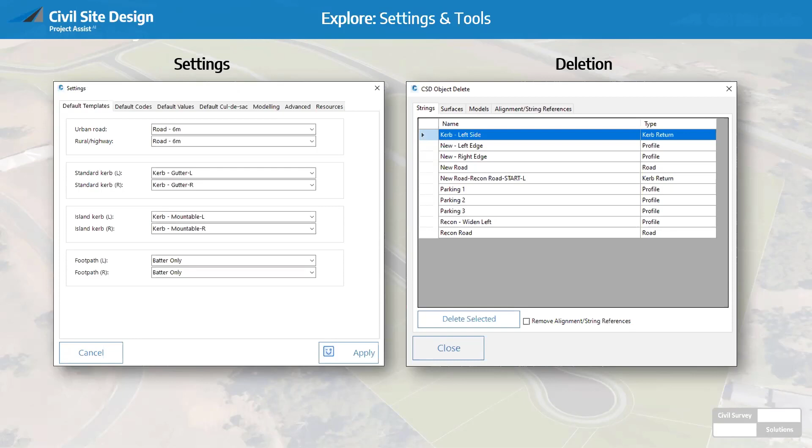So we're going to unpack some of what Project Assist can do whilst running through a set of projects. The key will be to loosely show you some of the settings and forms, particularly before we even start, just so we can talk through what the setup is.

Following that, when we actually start Project Assist, we're going to be looking at a couple of other forms which are really the key part of how Project Assist will work. One is the alignment usage type form, where the AI determines what alignment type, or string type, will be created for our particular alignment, and then the workflow manager.

Now, it's very difficult to explain this up front without actually showing you in context with some projects. So the way that Andrew and I are going to work today is we're going to create or work on 3 projects.

Andrew, I think one of the key differences between the version we showed in July last year and now is that you can work on existing projects as opposed to having to start from scratch.

Yeah, well, a big game changer was that you can run Project Assist at any time. Previously, in the beta, you had one opportunity to run it at the start. So now you can run it any time - you might even run it on a job you're currently working with.

Yeah, when it comes to everything we're talking about, including working on existing projects or new projects, this morning we published a playlist of quite a number of different videos on our YouTube channel, which talk in depth and unpack all of what we're going to be doing today.

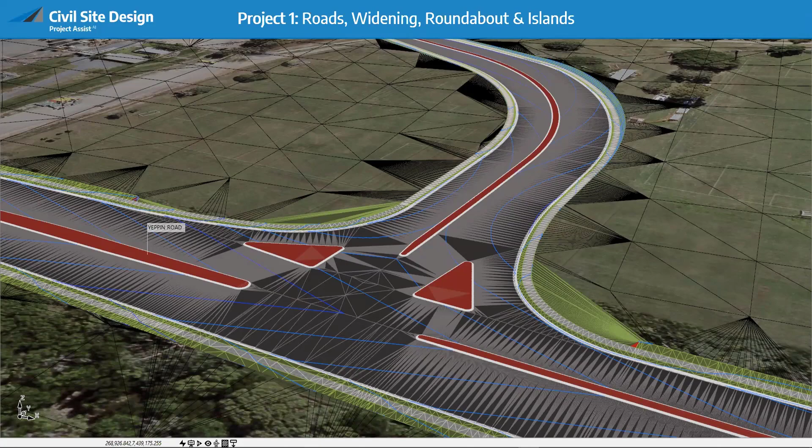Project Assist will do all of that for us, which is extremely exciting to see. Secondly, we'll be looking at a reconstruction road, building up in 3 phases, putting in a new road with some custom widening. Following that, we'll connect another road which has some widening and saw cuts. Then we'll get Project Assist to put in the parking bays. A lot has happened regarding trimming and maintaining elevations and connectivity, all of which Project Assist will do, and we will show you.

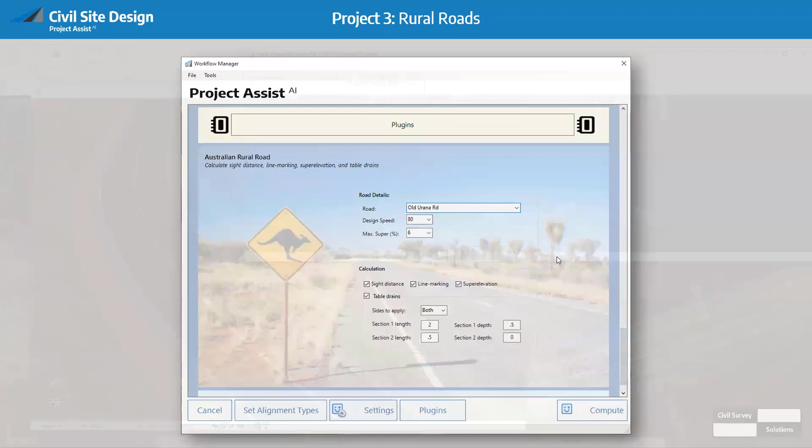I've got these 3 slides for the rural road. Towards the end of the session, I'm going to explain the idea of plugins with Project Assist, and we've created a plugin called Australian Rural Road. I have a background at council, working for a regional council, so I used to do a lot of rural roads. In my example, I'll show you this plugin which will automate super elevation, sight distance, line marking, table drains, all of that type of stuff. It shouldn't go too long, but the idea of plugins with Project Assist is pretty exciting for us as well.

For those of you that missed it, there's an example of something you may see in civil site design today, which we are using - well, at least I'm using a beta. So we'll be able to show some new exciting stuff coming as well - get a sneaky preview of some of the extra bits and pieces.

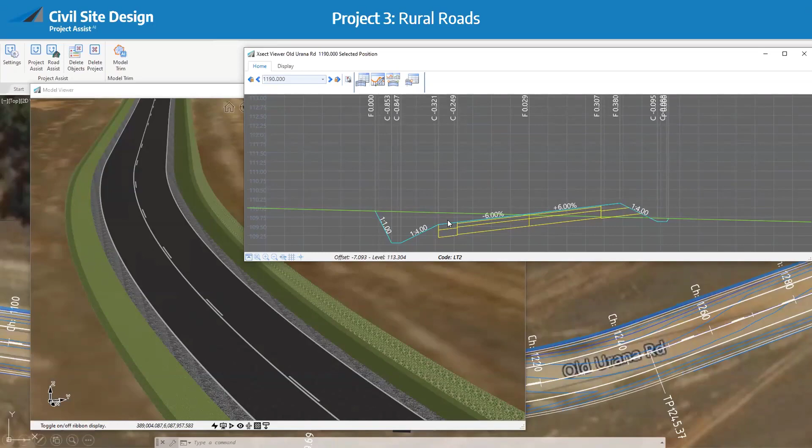Following on from a question we had earlier, about the version of the Autodesk platform and BricsCAD version this will work on - Andrew, would it be 2016? That's right, yes, onwards, and then BricsCAD V21. So anything pre-2016, unfortunately, we won't be able to use.

This project, all of the projects you're going to see today, are real projects. This is a customer project provided to us from Queensland. As far as setup goes, I have alignments that have been created by myself to delineate not only the crown, but also the left edges and right edges for all of the different roads. There's only two - and then we've got an alignment to delineate the outside edge. You'll notice you can see the alignment for the islands and the alignments for the roundabouts, but they're not going to be in play. So really all we're doing is focusing on the roads that we've got in play - I said two, I meant three - and the custom kerb returns that are added in here.

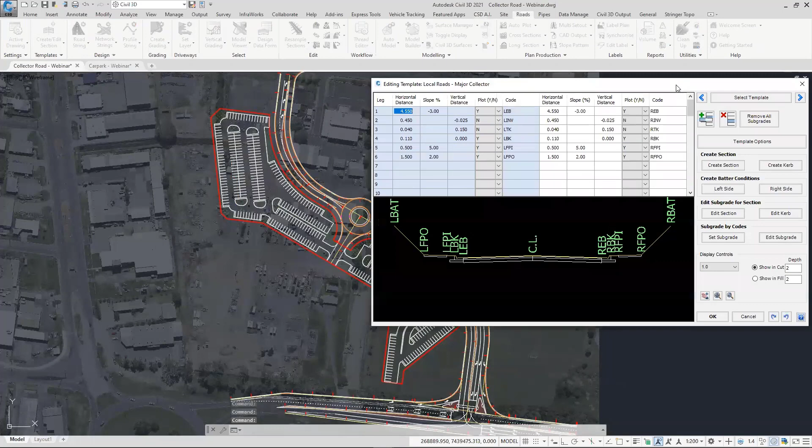As far as the software is concerned, we haven't done anything with this job. We have drawn the alignments. We've got one template, this template here, that we're going to be using for the roads. The kerb returns are going to be using auto, as you'll see in a second. So as far as setup goes, it's all relatively straightforward. As a manual process, I'd be looking to maybe use auto kerb returns, auto road creation, then manually creating the kerb returns myself, and applying design variations to widen the EB codes onto these alignments.

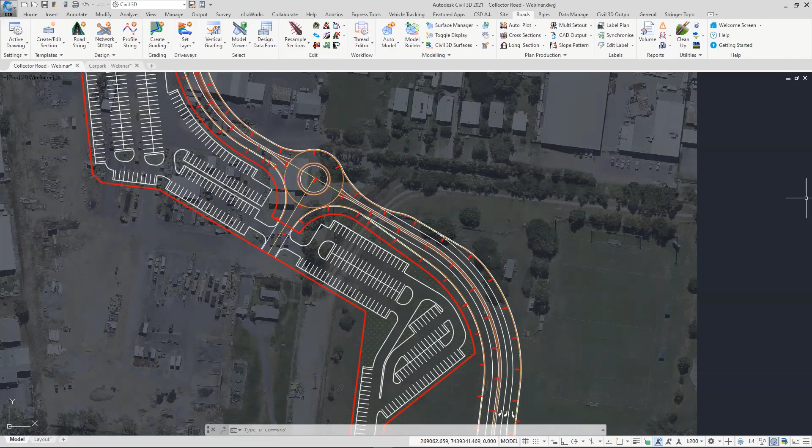I've just had a question coming about how do we access Project Assist. On V22, you'll see this ribbon up here - a ribbon tab. So on V22 onwards, you will see CSD AI, which conveniently is where I'm going to be going now.

Before we start, I'm just going to unpack a little bit of the settings. We have a video dedicated to the settings on YouTube. If you have a quick look at that, it's an 8-minute video, but it unpacks all of this in context to how it works with Project Assist. I don't just simply talk through the form - I show you in context how it works with what you're actually going to be producing later. But just a few things for you.

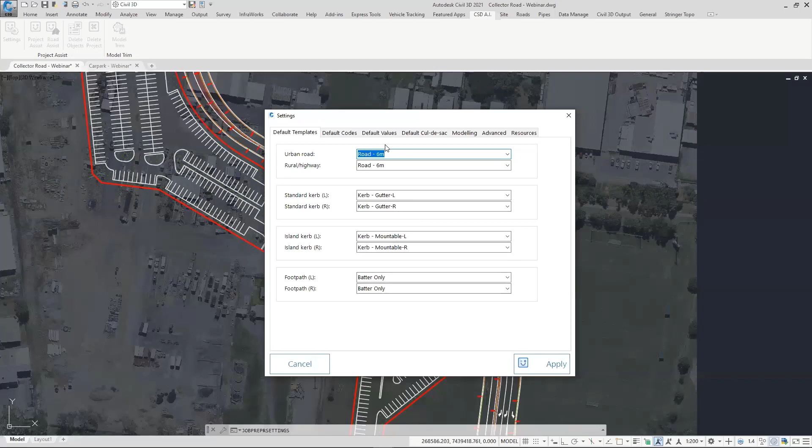First of all, what the software will do is look to assign these templates that you can see here to different aspects of your design. These are from your data folder. So in a second, Project Assist will fire up and it will go, hey, you've got an urban road here - this is the template I expect you'll probably want to put on there.

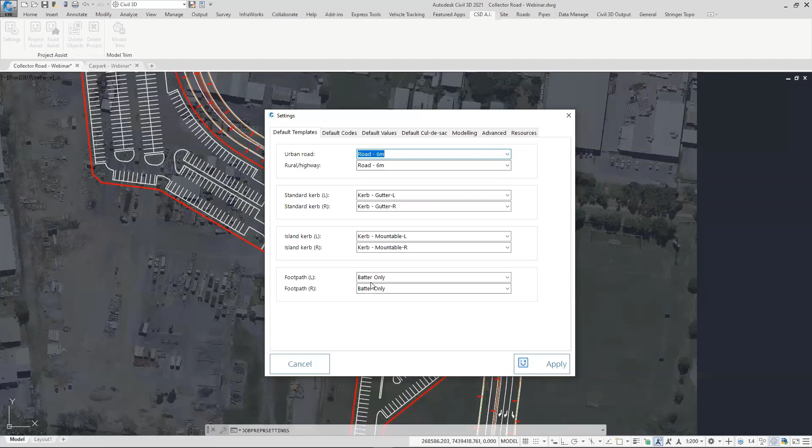Now, in my example, I'm going to change it in a minute, but I'll be using this one instead. So for each job, this is unique, but this just allows you to come in and predefine roughly the templates that you'd be looking to use. The default codes are what Project Assist will look for and then look to manage for you later on.

For example, I might be using a template where I've got a saw cut, and when the software sees the SAW code being applied, it will determine a number of different things it could do with that particular code. If you don't use saw cut on a job and you use SW instead, go ahead and change that.

There are some other tabs in here, but due to time, I'm not going to go into too much depth with them, only because we are really very limited. The video that we've created for this unpacks this in great detail to show you exactly what this does.

Andrew, have you got any comments on that, or I'm happy to proceed, or if you've got anything specific you might want to mention from this? No, I reckon jump in. The only thing I'd say is that video you've got on YouTube that you posted today on the settings is brilliant. It's about 9 minutes and it covers everything in great detail. Great, yeah, great, thank you.

Right, let's get started off. So I've got alignments, I've got templates. That's literally all I've got to start with. So I'm going to go to Project Assist.

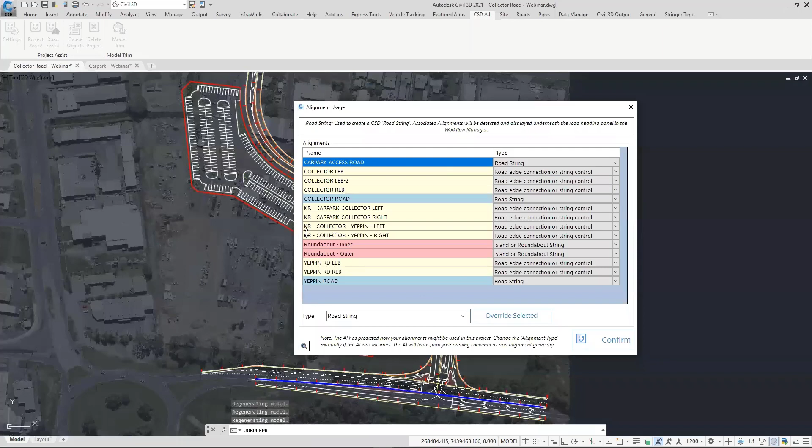Now, this is called the alignment usage form. There's a 6-part video series which explains what this does and then unpacks all of these different types. To make life very simple, for the start of this job we're going to focus on 2 types for all of these alignments. We're going to ignore the roundabout for the time being, but the reason why I've left that in there will become clear in a second.

So it has a look at all of your alignments in your project, and then depending on the naming convention, it determines what type should be applied. And as you just saw there, I can actually just go and pick a different type and override it.

Car park access road, which you can see highlighted in the drawing, collector road, which you can see is highlighted in the drawing, and Yeppin road - yes, they're going to become road strings. The alignments that are being used to control the left edges of bitumen and right edges of bitumen on all of them are always going to be set up as road edge connection or string control.

You'll find that road edge connection and string control does a multitude of different types, okay? But this is the one we're going to be picking. So for the LEB, the REB, the highlight on this is really helpful as well, so I can actually see where the alignments are.

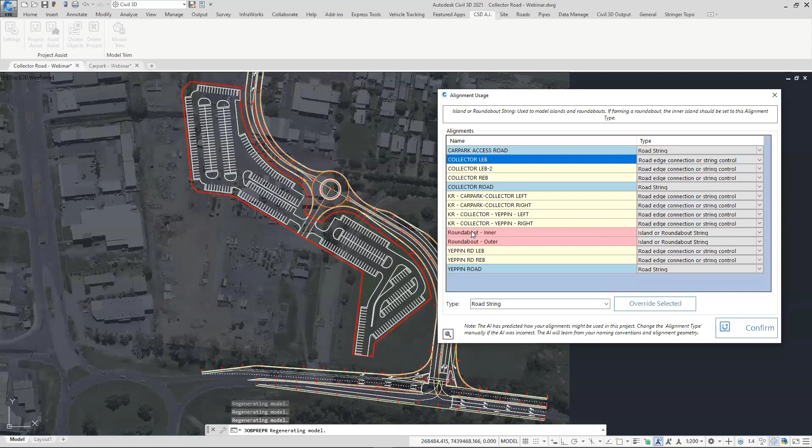Even things like network strings, curb returns, cul-de-sacs, knuckles, etc. - sorry, cul-de-sacs and curb returns only - they're always going to be assigned as road edge connections and string controls. The only difference with the roundabout inner and outer is that we're going to assign a different type, and I'm going to cover those when I look at adding the islands later.

Let's click confirm. Now, this is basically the first time this is run. So the software's gone in and had a look at the different types that I've set up and then determined how everything should be associated. So this is what the workflow manager can do.

So car park access road, this is the road over here. It's saying that it's going to turn it into a road and apply a template. All of them are going to have the same template. So as you can see here, I'm overriding that.

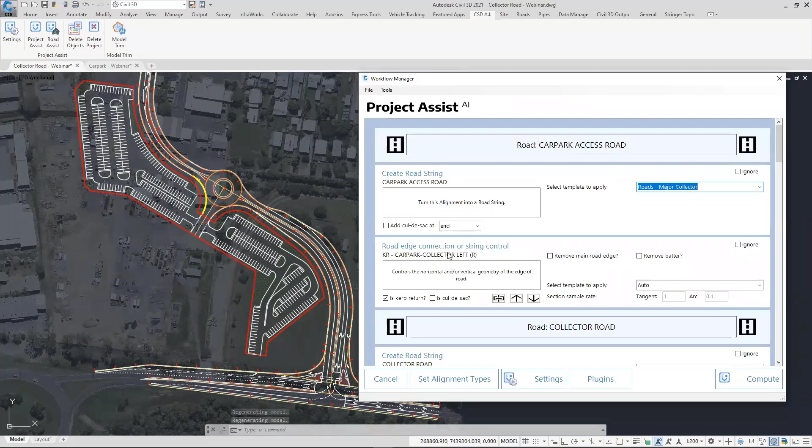Underneath, it's then got an alignment that we created for a custom curb return. And it's determined just by this checkbox here that it should be a curb return, okay? And because it's connected to, or associated to, the side road - car park access - this is the right place. So any curb return you create is always going to be associated to the side road.

Now, you'll notice that only one of the curb returns is being listed before we move on to the next road. And this is because, not every time, but sometimes Project Assist might not be able to determine which road the alignment should be connected to.

Right at the bottom, you'll always have a list of alignments that are not associated to roads. Now, we know that this car park collector road right here should be associated to the car park. So what we can do is use this little button here to associate it to that road.

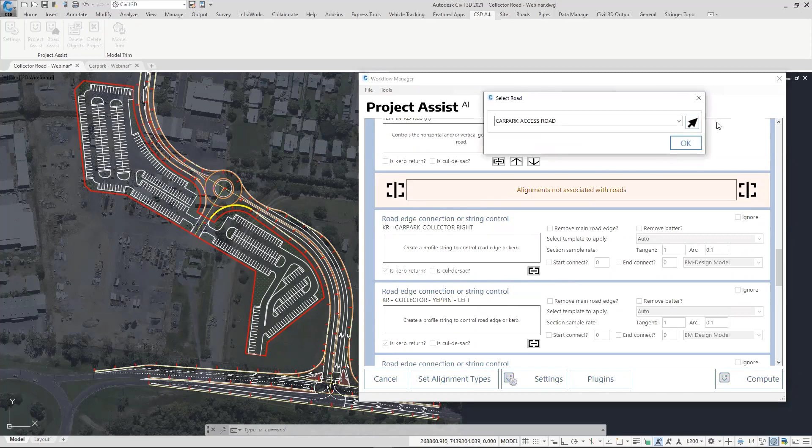I'm going to click on the button, choose car park access road from the list, click OK. As we go all the way up to the top here, you can see that I've now got car park, collector road, curb return, right and left, both associated to that road.

Further down, we've then got the collector road itself, and obviously the template we're picking there needs to be roads major collector. We'll be unpacking some of the discussions on thicknesses and resheets in the next job.

The LEB and LEB2 alignments, which are basically following along this left side here, the software asked what would you like to do with these? I can either take the LEB, maintain the crossfall that it is at the moment, say it's -3%, and position it onto an alignment. So it's basically using the match to alignment variation.

The second option says what I can do for you is create a string, a profile string on top of that alignment, and you can go in and have the code positioned on that string and control the horizontal and vertical elevation of that particular code. Lastly, you can then actually have the software create a completely independent string, so it won't be attached with a variation to the design.

We're going to just simply use horizontal control and maintain road crossfall, which is pretty much matched to alignment. We're going to do that for the LEB1, LEB2, and further down, you'll notice that it's saying it's creating a separate string.

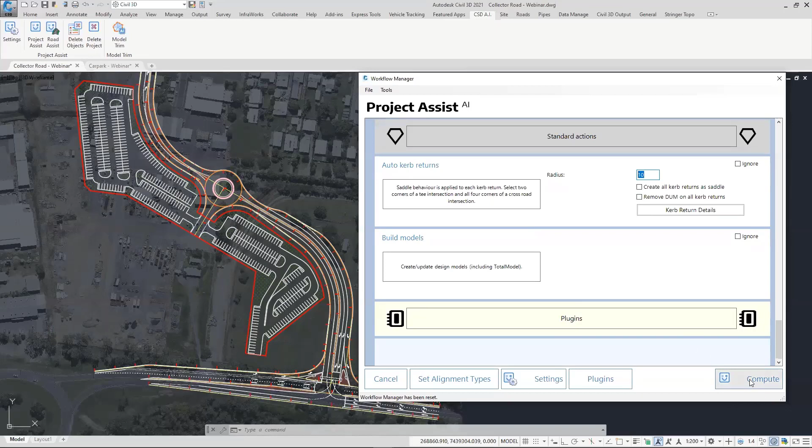This is real time. This is not me doing anything other than just letting the software build, construct variations, curb returns, and put everything together. Whilst it's building - in fact, that's done. Okay, so I'm just going to bring this in.

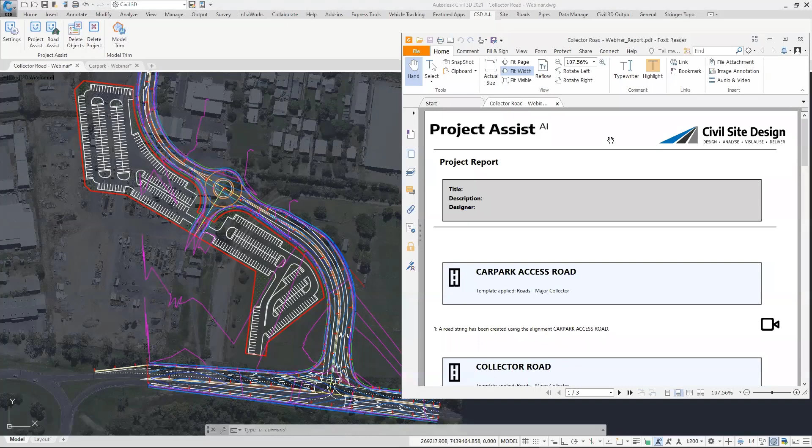When Project Assist has completed a build, it will generate for you a PDF report of every single step that it has done. So what you're seeing here is all of the work that you as a user would be doing if you were to create this yourself.

One of the best things about this is it adds in extra sections for detail. So when you're creating roads initially, you're thinking, well, okay, I'll just set this to 10 meters or 15 meters, and then you have to go in afterwards and start adding extra sections, whereas this does this for you. You can see here from the 29 steps that have just taken place in a matter of about 20 seconds, it's now built this for me.

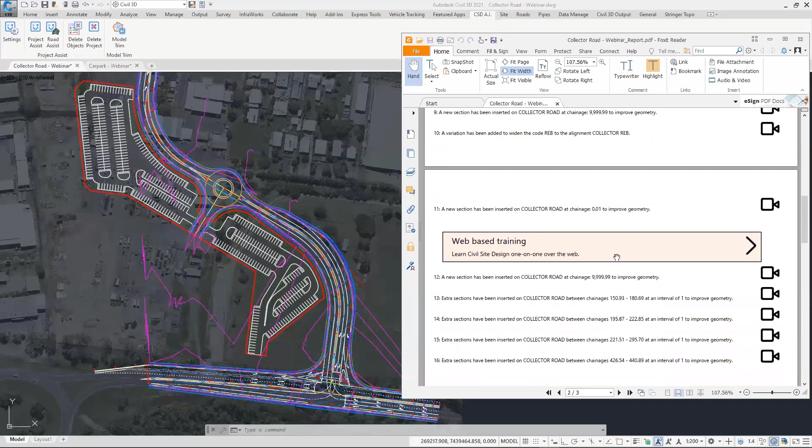Really, really recommend, when you run this for the first time or second time, look through what it's done. It's really important because you want to make sure you've set it up correctly, and that the correct variation, for example, has been applied over the correct chainage range, etc. This is building this for you, but we need to always have a run through to check it. Let's just see what it's done.

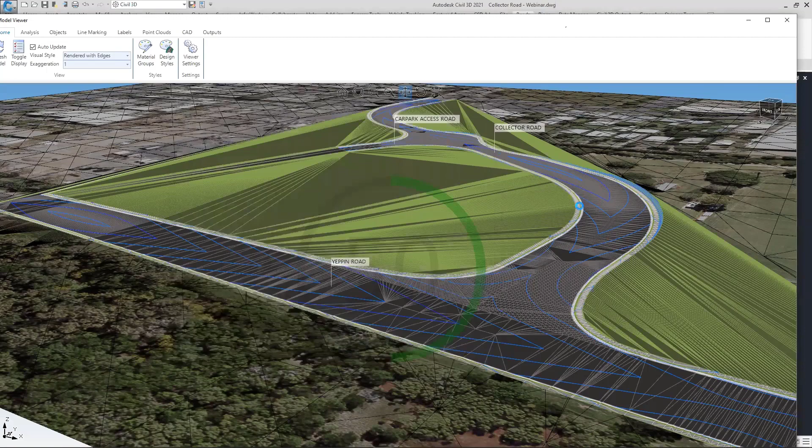What we'll do first of all is just go to the Roads tab, Model Viewer. Time is racing away, so I'm going to have to get through this quickly. Just bring Model View over to one side. I'm not sure why the built model got created, but anyway, that's something inherent from this job - we're just going to go okay. So if we'd started this job from scratch correctly, you would be seeing this. So this is what Project Assist has just built for us - got the roads, got the intersections, got the widening.

If I right click, display a cross section, we can see here by going to the display tab, and let's just pop in some alignments for collector LEB and collector REB. You can see it's matched up the codes onto those alignments. And if we go open section data, it's taken the LEB, matched it onto the alignment, and taken the REB, matched it onto the alignment. It's done that for all of them.

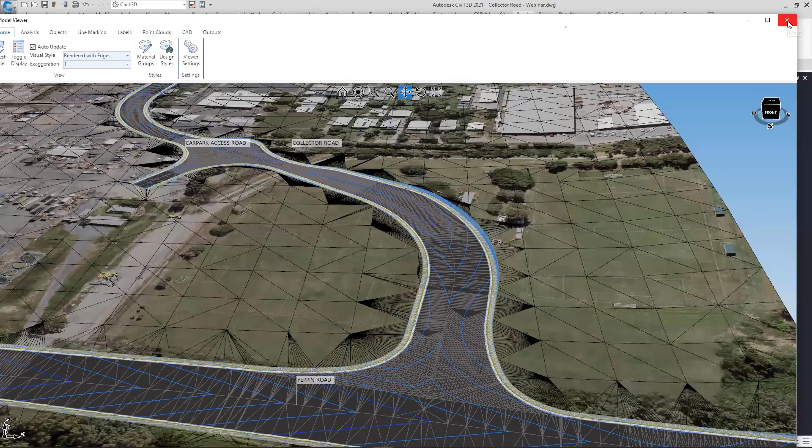So as far as just quickly generating content goes and building your road from scratch, that's obviously the first part. The second part is, well, what if I want to add islands? Now the islands are quite extensive, as you can see here.

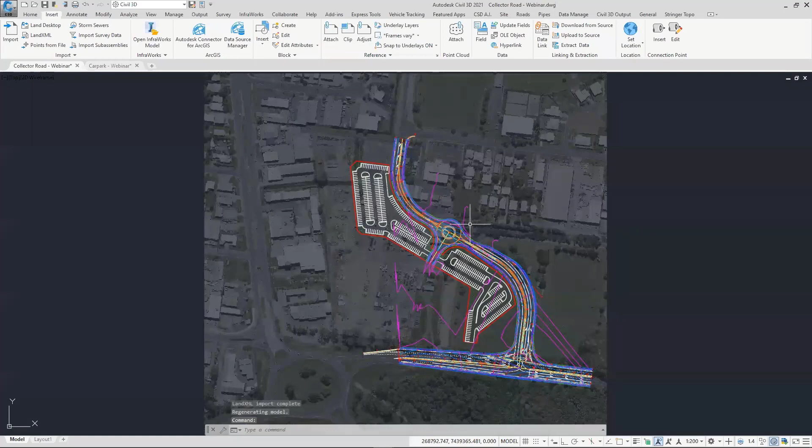Well, in fact, what we'll do is first of all bring them in as an XML. So rather than having them in the job initially, what I've done is created them as an XML file. And the reason for that - when we looked at the alignment usage form, it would have been quite overwhelming for you guys to see a lot more alignments. So we've basically done this in two parts to reduce the impact.

So we've got alignments here for our islands, as you can see here we've got 6 of them down here. And we've also got, which I'd already had in the job - a great way of being able to show you how ignore works - a couple of alignments for the roundabout. So the intention is that these islands will simply become draped profile strings draped onto a surface, and then the roundabout will also need to be draped.

Now let's run it, but there's going to be a small caveat with this - just saying simply drape onto total model won't work. So what we're going to do is go to project assist. You can see the roundabout, outer and inner, are still there.

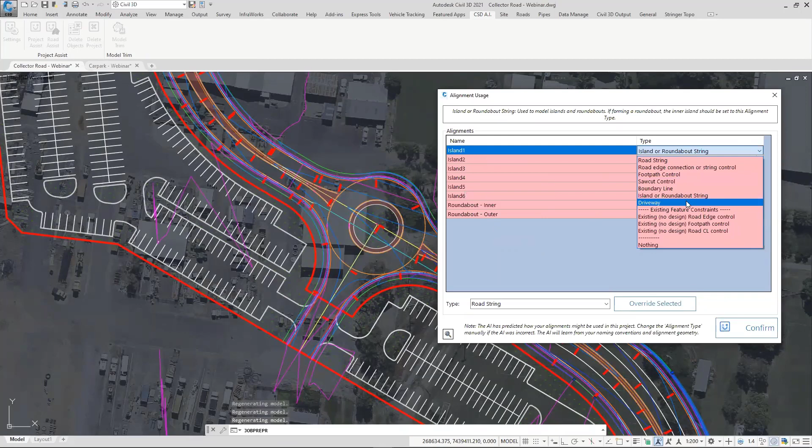They're all being chosen as island and roundabout strings. Okay, the software will know if it's a roundabout as opposed to an island, but they're all getting the same tag. We're going to click on confirm.

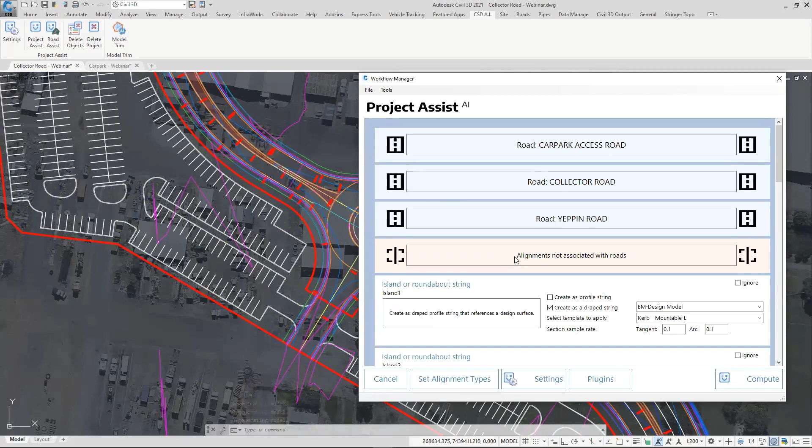Even, and this is my bit with this - even if you use Project Assist just to do these islands, just to do islands on projects, it's still a huge time saver as opposed to doing this all via Model Builder.

Now, they're not associated to roads, because they're going to be draped onto a surface. When you create a draped profile string, you always determine that there's a surface that it's connected to. The surface it will be connected to is this one here.

BM design model. The software is going to use Model Builder and create a model which combines all of the strings already in the job, including Total Model. It's then going to take that model and allow us to drape straight onto it.

Once it has draped the islands onto that surface, we've got a model with islands placed on top of it. If I want to see all of that combined, the software will go ahead and create another model which combines the design with the design of the islands.

You'll see this happen in a second. This will take a little bit longer than the previous one, but it gives us a chance to unpack maybe the PDF. The reason it'll take a bit longer is that sample rate of 0.1, and those islands are quite long.

I might speed this up a bit, because this is one single radius, so imagine every 100 mil around that arc, it will take a bit of time. For the remainder, I'm going to be putting in every 3 meters for a sample, which compared to 0.1 is quite a bit healthier, a little bit quicker.

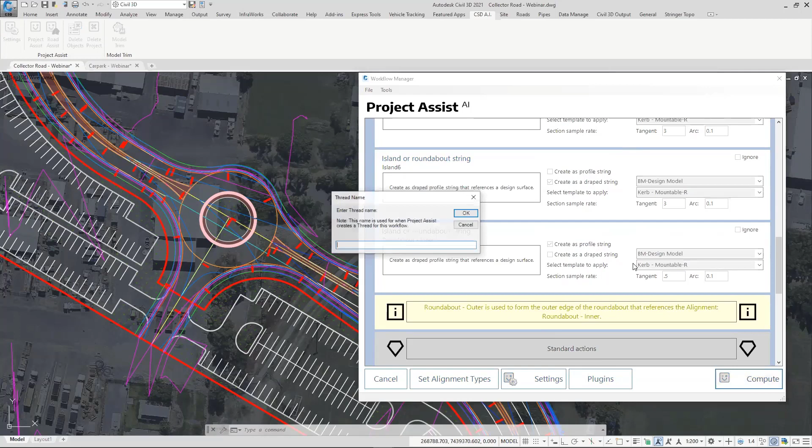Let's click on compute. I'm going to give this a thread. Now this will take a little bit longer. As Andrew's already pointed out, the sampling can be increased.

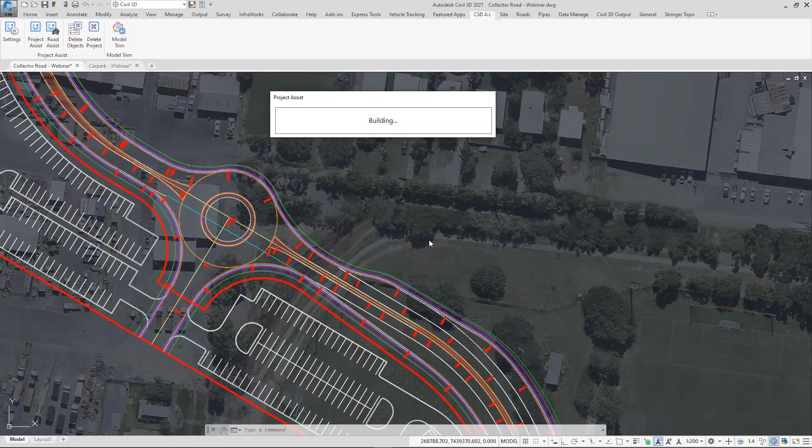To be honest, when I've run this with the sampling around 0.1, it takes about a minute. You may be thinking, well, a minute to create that many drape strings - maybe you're thinking that's incredibly quick.

What it's also doing here, whilst draping the strings onto that surface and creating them, adding the template, is it's also using Model Trim to cut all of the centerline and dumb codes out of the model where they overlap on top of these particular strings.

So in a minute, what you're going to see is the centerline no longer within this particular model being drawn underneath these islands. This is the part where Model Trim, using Project Assist and Model Trim, comes into its own. So that's perfectly timed.

As you can see here, we've ended up with approximately 51 steps being taken. So I might just close that down.

Let's have a look at what's happened here with the model. I'm actually going to jump straight into Model Viewer. This gives us the best context, particularly when it comes to looking at drape strings, to see what's happened.

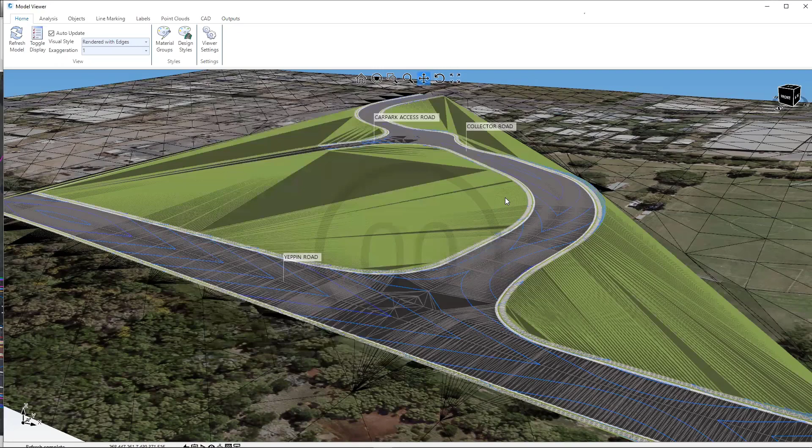So here's Total Model. We'll go Toggle Display, and we'll ask it to simply just show the built model here, built model design. So the software went ahead, created a built model, and just said, hey, include Total Model. That's all it's done. Then, once it's done that, it's used that to drape on the islands, which is this model here. I'm going to click OK. And this is the work that it's done.

So for a start, this is one of the nasty little islands that I've had to use Model Trim for. Project Assist has used Model Trim to trim the dumb codes from the curb return and the edge codes from the road to complete that all the way through. We'll come back to what's going on here in a second, including the roundabout.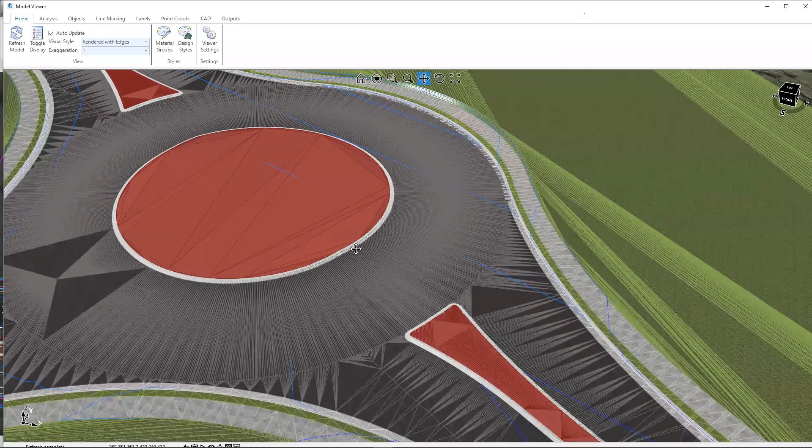The roundabout has been draped around the edge onto that particular surface. If we right click over here and open the vertical grading, the inner string has been created. So this isn't a template that's coming across here - this is pure modeling that we're seeing.

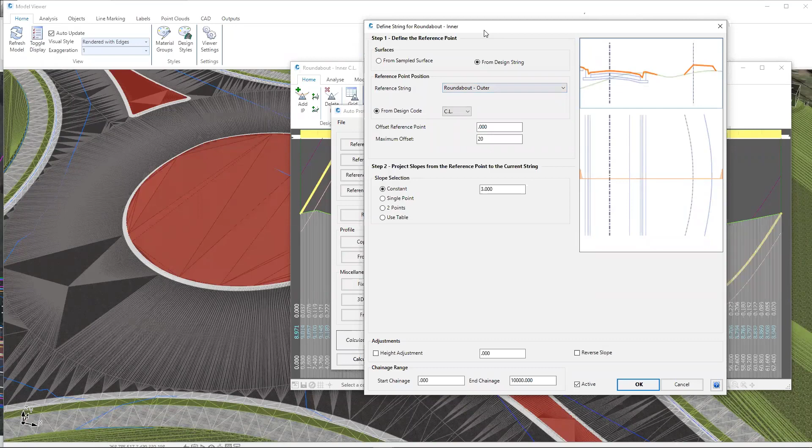The inner string, called inner here, if we look at auto profile, all of these constraint values have come from the settings - so have a look at the settings video. I'm going to double click, and you can see the roundabout outer, using this reference point entry. I made a big song and dance about using reference point in the string techniques webinar a few weeks back, so have a look at that to unpack reference point in more detail.

You can see here the elevations of the inner are being set 3% above the center line of the outer, which is this here. So if I wanted to change that, I could go in and change those values.

So we're building you a project which you can now go in and start to work with and manage. The hard work of Model Builder has just been done for you. The center line of these two roads across this intersection have been cut out, and as you can see, we've got this really nice smooth transition into the roundabout.

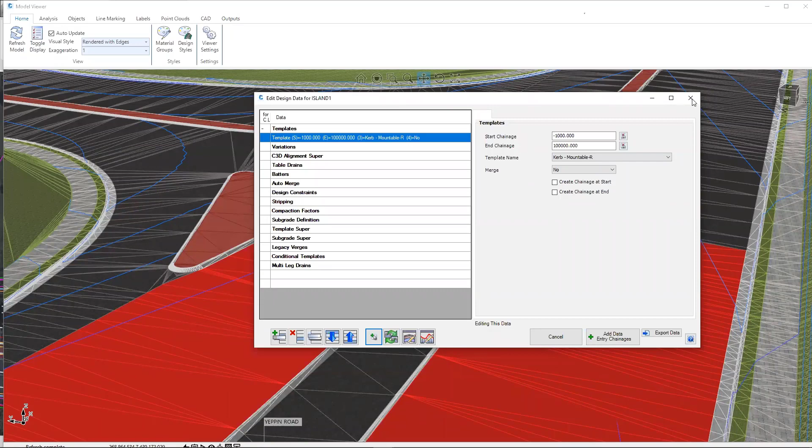One thing you may not get perfect every single time is you can see here the template that was applied was actually the wrong way around - instead of kerb mountable right, that should have been left. So we're just going to go to templates, change that to kerb mountable left, not the other way around, run auto model, and we're just going to close this down once it's finished. So that auto model is now updating all of the models in the background.

So that's the first example. Took a little bit longer than I intended, but we've unpacked a bit more on this. You can see how in a matter of minutes, I'm able to build this and start designing.

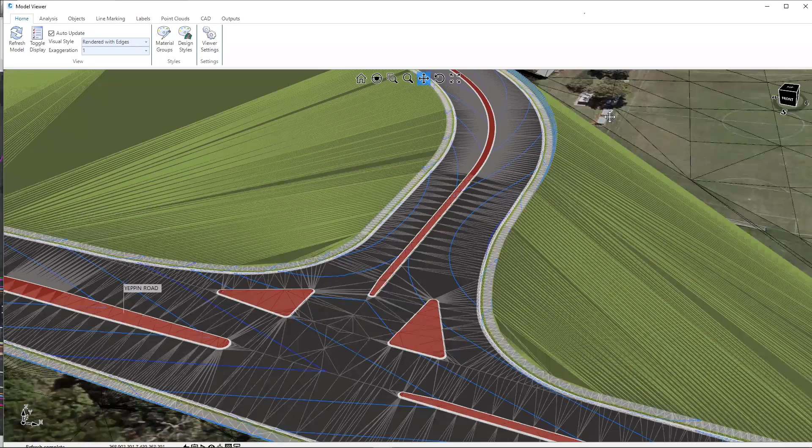The hard work has been done for me with Model Builder. I can start to work with this, knowing that in the background I've also got threads. If I go to thread editor - islands, here we go - I've got roads only. This is an entire thread to update my design if something changes, and I've got another one here called islands. So I can just compute the thread to rerun it if something changes, which is extremely handy.

So that's the first job we wanted to cover. Andrew, have we got any questions just while I'm flicking over to the next project? Okay, let me just jump in.

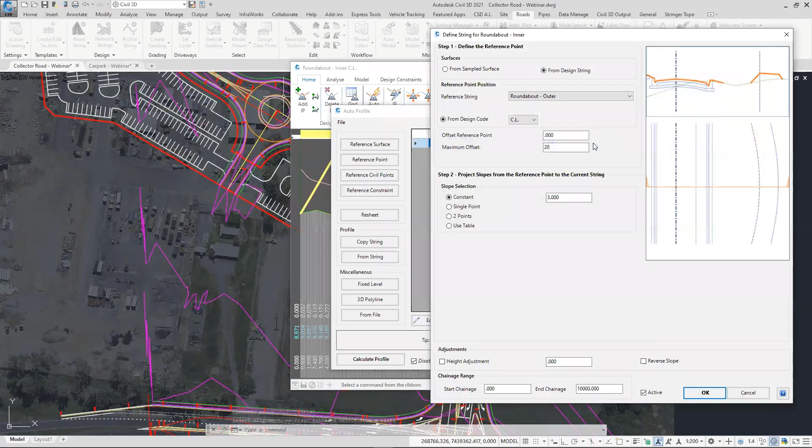We had one question: can you manually change the string for the crossfall if there are constraints? Yes, you can. What Project Assist is doing is creating the strings for you, setting up the design constraints, and setting up auto profile entries like the reference point that Jonathan showed. The beauty is everything that's done could have been done manually by you. This is a great thing about this type of automation - there's no sort of black box stuff. So if you want to delete entries, override stuff, change stuff, you can.

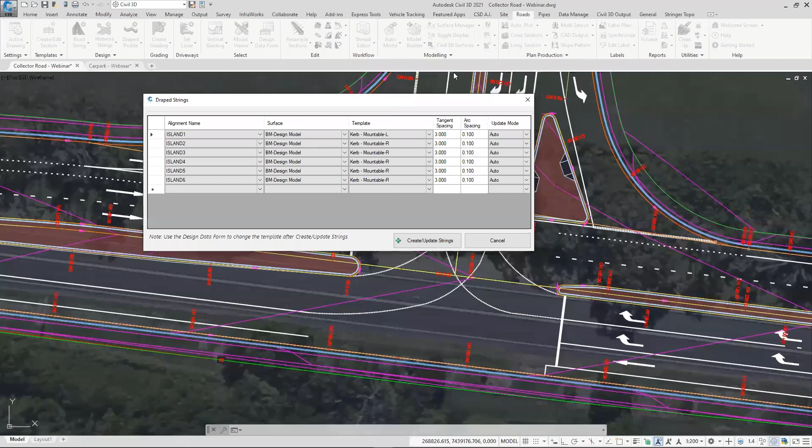If you look at traditional automation, it can be a bit constraining. A good example is the kerb return command, where you have to follow certain rules and parameters in order to get it to work. But this is building the project up the same way a user would.

And in fact, the next part of this is if you want to remove something from the model, again, the way the user would - I'm just going to take out one of the islands. Normally you'd probably go up to the roads tab and delete string, and by doing so you then leave an entry in Model Builder for that string. There could be other consequences because you've then got to tidy up and remove other bits and pieces from your design.

Civil Site Design in the CSD A.I. tab now has a delete objects option, which you can also use just as an independent delete option. The great thing about this is it does everything - it removes all of the variations, references, and model builder entries along with that string. So if I go to island 1 here and just remove references, the impact of doing that would be fairly significant.

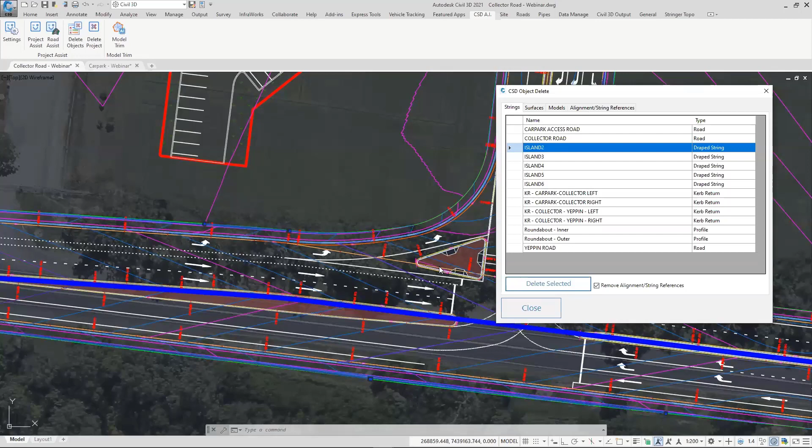Okay, I've got to remove a draped string entry, so let's go delete selected. It may take a few seconds to wipe it out. The idea is that this tool, and others in these tabs, are a great way of removing content, including content that's been added to models, which is one of the big things. We'll get a notification in a second saying it's complete, click close, and that model has now been updated without the island included.

Following on from that, I wanted to show you one other tool next to delete objects, which was delete project. If you want to get rid of a project that's semi-started, I've decided I want to start from scratch, so delete project. Yes, this won't delete your alignments, it will only delete your strings and models. Go, and now I've started from scratch.

So the intention was just to show you how those two tools work. Again, this job has had a little bit of work done to it. We've got alignments for the left edges and right edges of both roads, and we've got one for a saw cut here on this particular road. We've also got alignments to delineate the parking bays, and we've got a couple of templates, which are as follows.

There's quite a few in this particular job, as you can see. We've got new road, which is the road going in here, a straightforward road with a one-way crossfall. In addition, we have reconstruction road, which is slightly different, but it's got some saw cuts positioned in it, which will be quite an interesting one to show you.

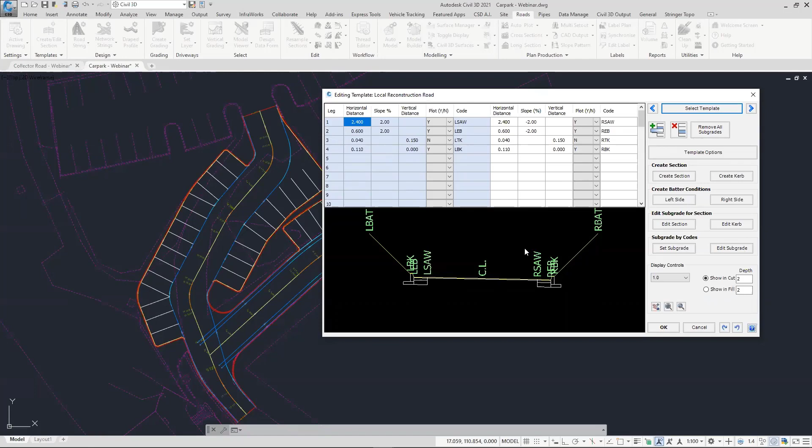So what we're going to do first is build new road on its own and have the left edge and right edges managed with those alignments. Very similar to the job we just did. I'm going to go project assist, and you can see here that all the alignments are offered to us, including the parking bays.

Okay, so we're going to ignore the parking bays, and we're going to ignore everything that's got recon in it. We're going to look at new road - new road will become a road string. I'm going to be managing the left edge and right edge of that road, so these two alignments will become road edge connection or string control. We're not going to set anything for the remainder.

As I said earlier, what we're going to do is use ignore to ignore those. So for new road, we're going to be using the new road template. We scroll down, we can find that here, and further down we can then tell it what to do with the left edge and the right edge.

And again, due to the fact that the geometry on this left edge and right edge is quite varying from the center line, we're going to override the fact that the software is warning us that the string-based design approach could be better. We're going to say horizontal control.

We're going to ignore the parking bay, okay, and not have that as part of the design. Same goes with this parking bay here. The recon road - I was tempted to ignore that as well, actually. Yeah, so as I said, we'll ignore all of this, so nothing else is being constructed. It's just a road with a left edge and a right edge, which is essentially two design variations.

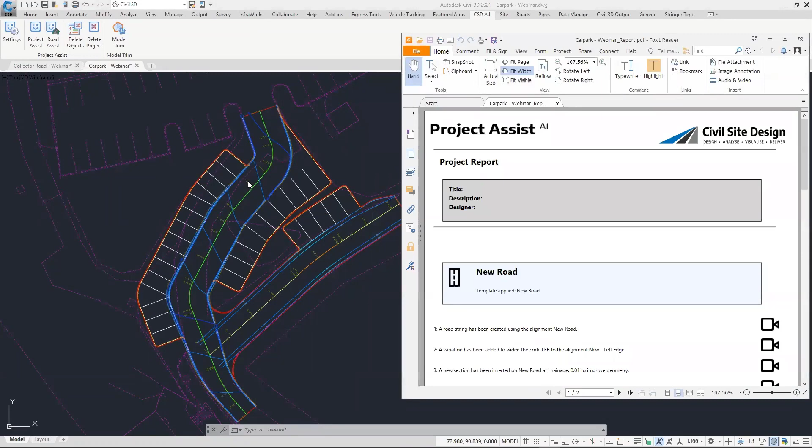Let's click compute, call this road, call it new road, click OK. That takes a matter of seconds, as you can see there. Road 1 - a lot of extra samples have been added in because we've got this varying geometry. Just having a simple 10-meter sample rate isn't going to really cut it, so the software's gone and added in a lot of extra sampling for us. As you can see there, it's undertaken those 11 steps.

Then we decide, well, actually, I'm now going to build this recon road and connect it in with some curb returns, one of which I thought I had an alignment for, but obviously don't. So we're going to go project assist again. We're not going to be clicking on ignore - the one thing we're going to focus on is just what's happening with recon. Sorry, I mean choose nothing from the list.

Recon - left saw cut and right saw cut are going to be flagged as saw cut control, and we'll see why in a second. This goes back to using the saw code within my template. The left edge and right edge, or edges of bitumen, are again going to be road edge connection or string control. Let's click confirm.

So we're going to ignore all the parking and we're going to come down to just uncheck these boxes here. In fact, let's uncheck recon road, because recon road is the master, ignoring that ignores everything that it associates with it. We're going to choose recon road, or reconstruction road, from the list for our road.

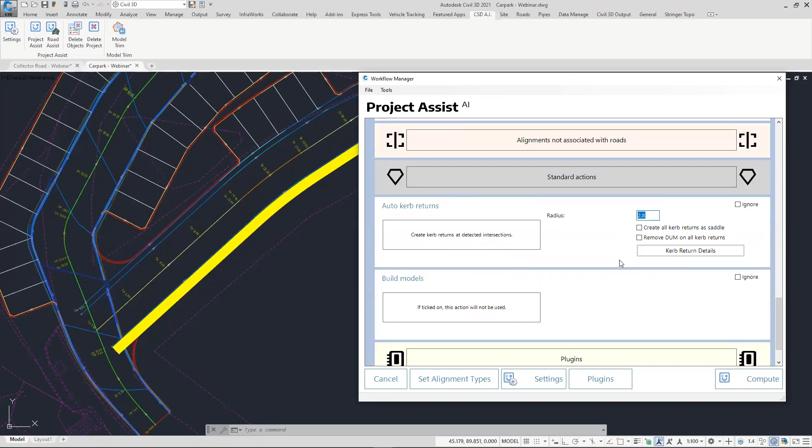Set the elevations to a string. Further down, I don't think — here we go. So there's going to be creating an intersection here. We've got 2.8 meters on the south and 2.8 meters on the north, which is what I'm applying here. Nice and simple. Let's click compute.

I'm going to give this a name. So again, really important that we read through the PDF to basically understand what it's done.

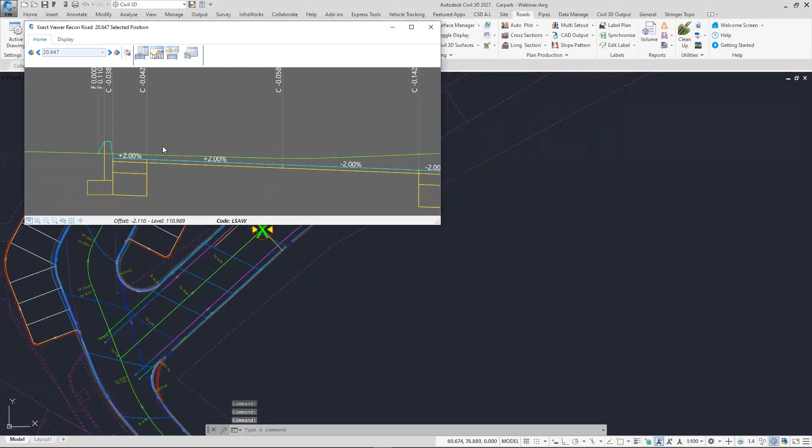What we're going to do is open up a cross section to have a look at Recon Road. And then we're going to open up the design data form. And in addition, just quickly show you the VGE. Don't think we've got auto profile.

No, we don't. Okay, so as far as elevations go for the center line, all that's happened is that the software has just done what it normally does when it creates a road string. It's just interpolated the surface and popped on a few IPs for us, which we can manage if we want. What's happened with the saw cut, okay, is that it's been positioned maintaining that slope.

Of 2% onto the alignment on the left side and on the right side, hence set code to alignment. So it's maintaining 2%. The LEB and REB are then actually being told to be positioned onto a string that it's created. So there's now a profile string maintaining the elevations, or setting the elevations, of the left edge of bitumen and the right edge of bitumen. Let's have a quick look at those two, or one of those strings.

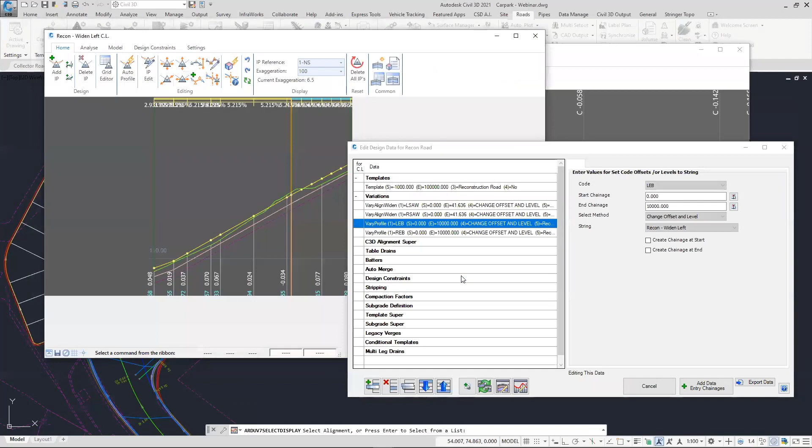So I'm just going to click here. So in similar fashion to what's happened with the roundabout on the previous job, we have an auto profile entry being created. And in there, we have a reference point entry. And in there, we have the following.

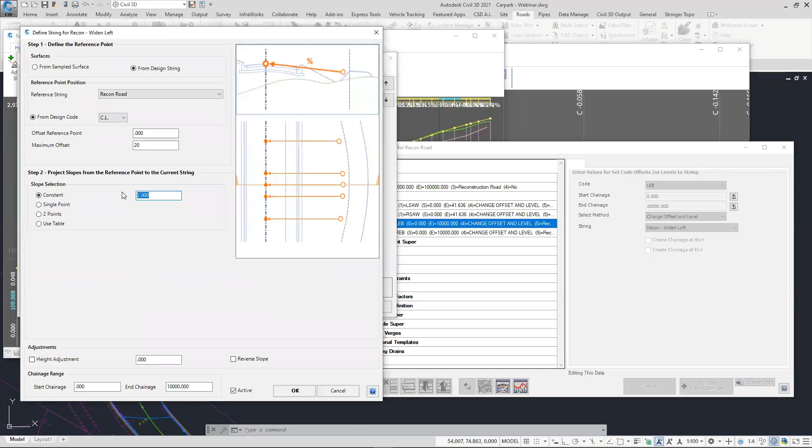So again, this is editable — if you decide, well, the slope isn't right or you need to change it, then this is entirely editable. From the Recon Road centerline, I'd like to set the left edge of bitumen to be 2% from the centerline. So the left edge of bitumen and right edge of bitumen are both being controlled with a profile string that is elevated 2% below or above the centerline. So again, you can start to go in and manage these elevations.

You could decide, well, actually, I want to go and tweak or change some of what it's done. You'll notice that it's managed to maintain all of that, even where we've got some widening between the saw cut and the left edge of bitumen, which is extremely handy. Have a look at the three-part set of videos we've done for that, because we unpack 3 different options.

That's a great way of seeing how you can use those 3 different options for this particular road. The last thing we're going to do is add the parking. So this is a really interesting one. Many times I've seen people use design variations and push the parking or the curb out with a design variation onto this alignment, which doesn't work at all when you get to here, and particularly when you look at this job or this particular bay, really doesn't work. So let's see how Project Assist handles it.

We're going to go back to the CSD A.I. ribbon, Project Assist. We've got our remaining alignments. Now, if you are connecting or using elevations of a road, which these parking bays will need to tie back into, we make sure that they are called road edge connection or string control. So as far as this webinar is concerned, really at the moment, all we've done is unpacked 1, 2, 3, 4 of the alignment usage types, because the majority of what you do will probably incorporate just those 4, okay?

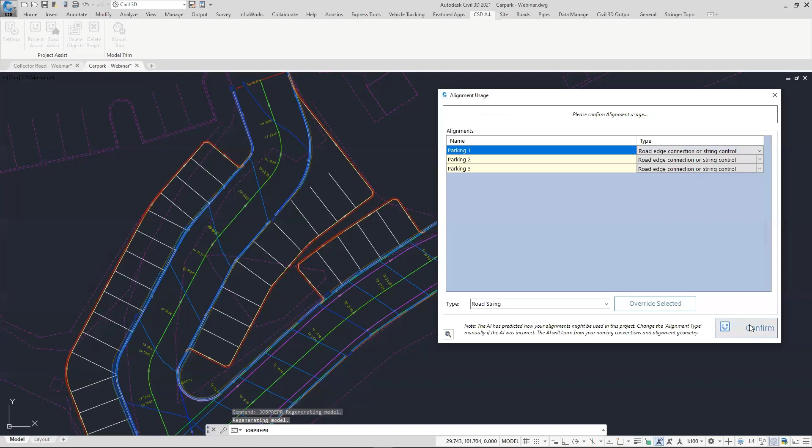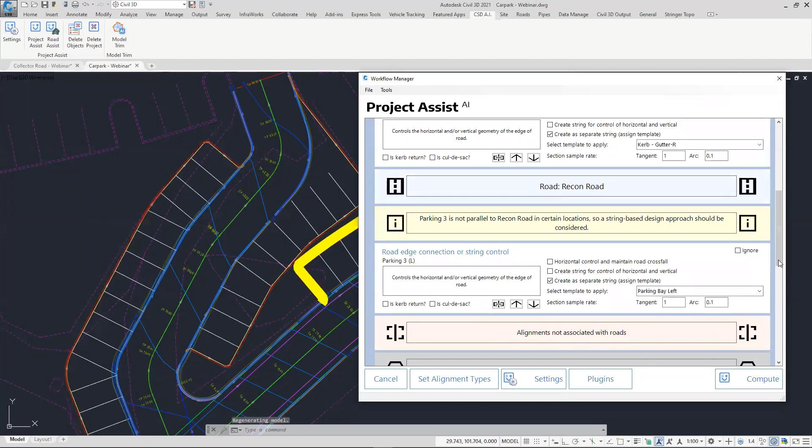Now, we checked ignore earlier. The important thing to do is, if these are not roads, okay, is we have to do something similar to what we did with the curb return. Make sure that they are associated to the road they're connecting to. So if these parking bays were just sitting somewhere further down the list, just not associated to roads, we need to make sure that they're associated, as I've just done.

I've disassociated that parking bay. Make sure it's associated to new road, meaning that it'll try and connect in the elevations. Click OK.

So we've got parking 2. And what we're going to do is say, yes, I want this to be a separate string. I'm not going to be using design variations to form this. I'm going to use a separate string, and I'm going to go parking right, parking bay right. This is just a mountable curb.

On the left side, I'm going to use parking bay left. And further down, you can see I've got parking bay left here. The sample rate is up to you. Let's click on compute. Oh, by the way, sorry, before I do that, you can see parking bay 3 is correctly associated to Recon Road, which is what it's connected to.

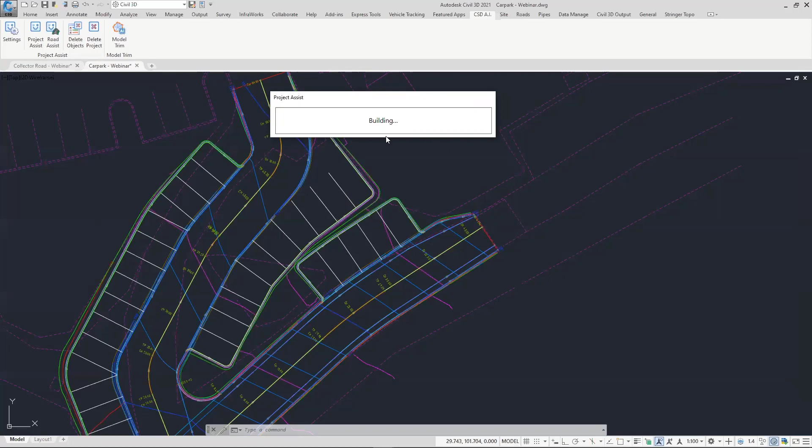We'll just call this parking and click OK. You don't have to have the thread being named for you, but that's just something I've got set up in the settings for me. So we'll just let that build. As you can see here, the strings are being drawn. You can see the line work for those strings going in on all sides. And once that's finished, we'll then have a look at what it's done, because Model Builder has been employed here.

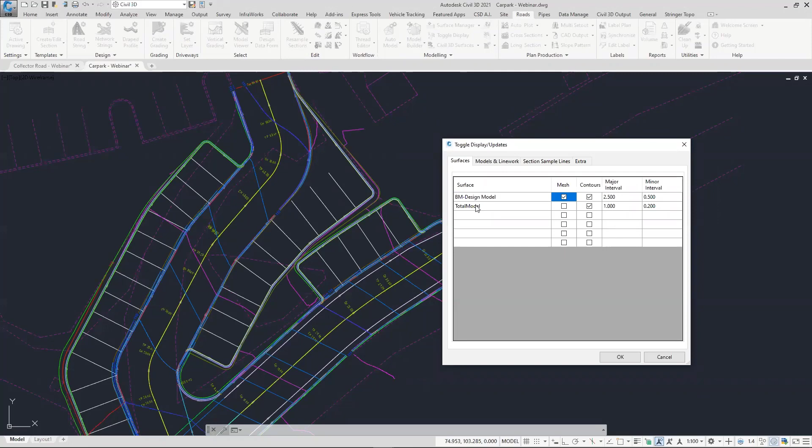So again, 29 steps there have been taken to build this for us. Let's have a look at this. We'll turn on the mesh. Notice there's no islands. And the reason for that is because we're not draping onto another surface. We're simply just connecting the roads to the parking bays. And the only way you can do that is with Model Builder, and it will create this surface for you.

Actually, no, we won't go with Model Builder. Sorry, with the mesh. We'll look at it in Model Viewer. It just gives a little bit of context, or better context. Now, conveniently, I've left all of this on from a previous attempt, which is my own fault, but that's okay. What we'll do is we'll just go in and, well, I thought we'll leave it. That's okay. It's great to just show you really what it's done.

So it's used Model Builder on both of these roads to cut out the road that was being built all the way through. And by doing so, it's then placed the parking bay or parking bays in and replaced it and then built it together.

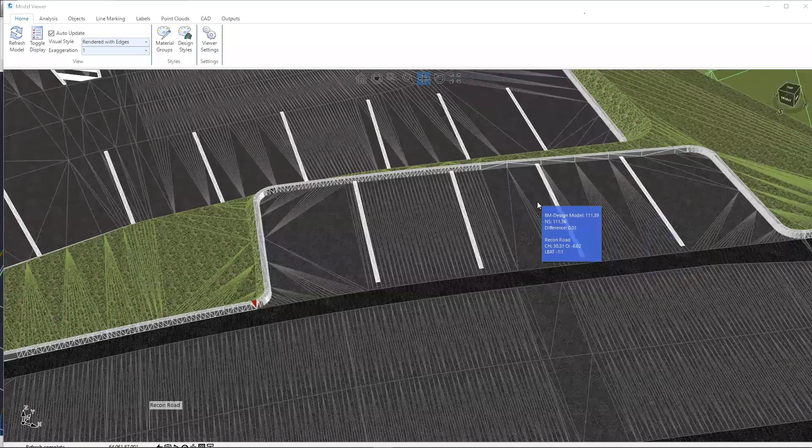Have a look at the independent string control techniques webinar I did a couple of weeks ago, where I put in a parking bay, and then we use Project Assist to actually do this.

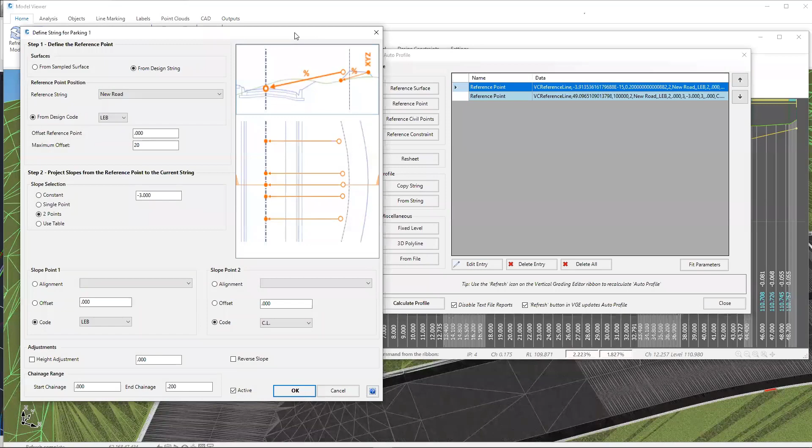So the way the software has calculated the elevations of this parking bay - if I right click and go vertical grading editor, this is the parking bay vertical design. If I go auto profile, it's added a couple of reference point entries for me. The way it calculated the start and end of the design is it used reference points to calculate the slope between the center line and the left edge of bitumen, then used that elevation and assigned it for the start and the end.

Have a look at the string code techniques webinar to get more details on that - it's done that with all of them. There's also Surface Extend, string code Surface Extend, which is a tool where you could come in and start to use that to set the elevations of the parking bays.

In addition, we've added the line marking here, which I was going to do, but it's already in there, which is fine. We've used a couple of layers of line marking drawn in the drawing. We go to marking setup here by polyline, and we've used some of the default types to set up some of the line marking that's in here.

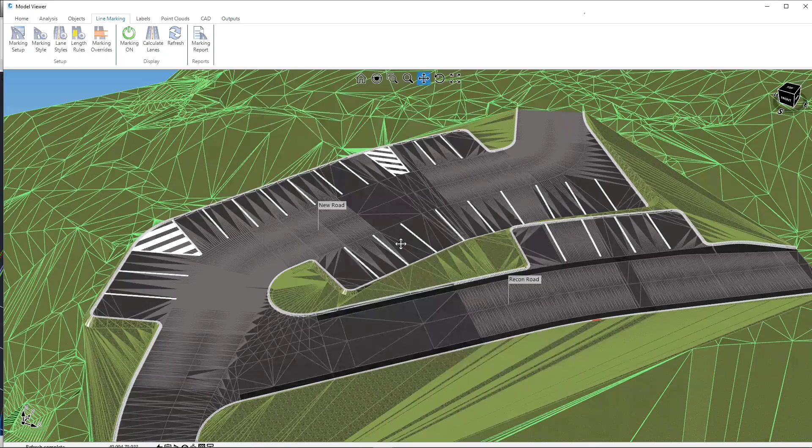So the intention of this particular project was, yes, it's a whistle-stop tour of what the software is doing. I might just, as a final thing here, show you how Model Builder has dealt with the road.

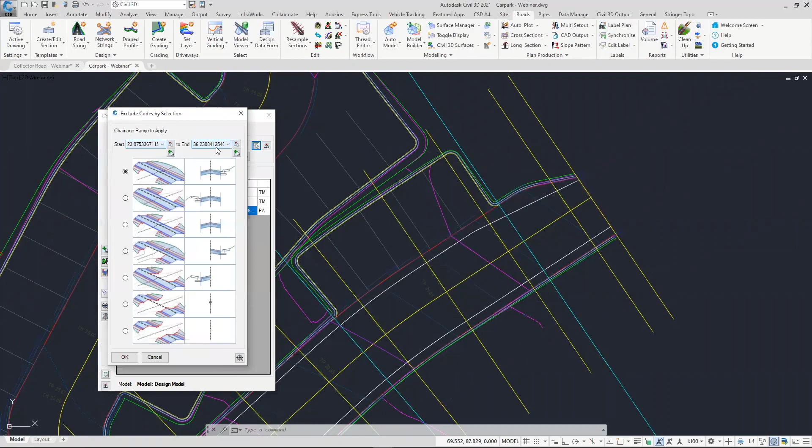I'm going to go up to here and go to Edit, and we go Recon Road. You can see here there's an entry called PA - that means Project Assist. It's an editable entry, unlike the total model entries. I right click and go Edit. You can see the software has calculated the start chainage and the end chainage, removed everything past the EB code, cut that out for us, and built it together with the model.

Now I've whittled through that, Andrew. I'm very, very close to end of time. I apologize. Would you like to present your rural road part of the presentation? I don't think mine will take too long. So let's jump into it. No problem.

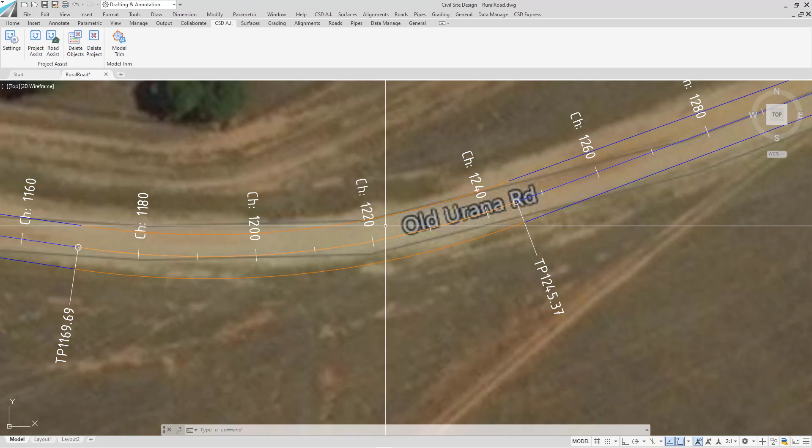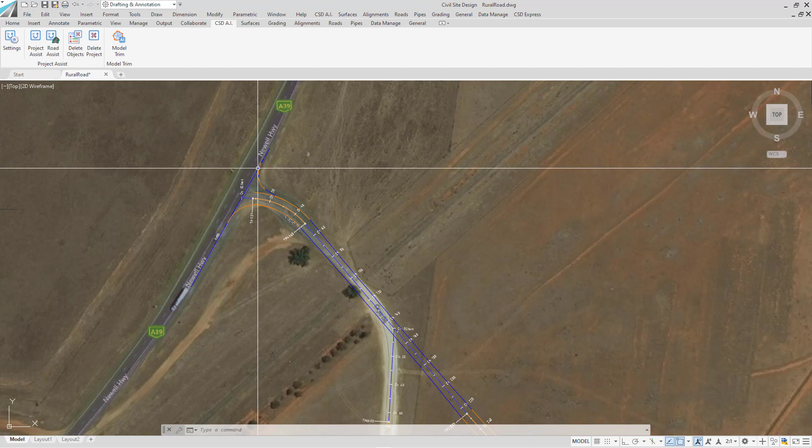So in this project, I have a number of alignments. I have an alignment that represents the center line of the road. I have some alignments controlling the road edge, which widens around the curve. We have some side roads connecting in, and then an intersection where I've got an alignment representing the existing edge of this highway, and then some alignments that control the curb return geometry.

So by running Project Assist from the ribbon, the software will review the alignments and assign an alignment type, which we can change and train the AI if it was incorrect. So we can see the main road alignment is a road string. We have an alignment for the existing road edge, which has been detected, and the alignments that control the widening and the curb returns have been set at road edge connection or string control.

So once we're happy with that, we just click on confirm, and the workflow manager will appear. The AI has created this for us, and the idea is that we scroll through and tell the AI how we would like to set up and create this project. So firstly, we have the road string being created. The software has detected that this alignment looks like a rural road, so it's applied a rural template for us.

The widening is set up by adding a variation to widen the EB code on the template to this alignment, which we could change if we wanted, but I'm happy with that type. Then we have some curb returns at the intersection. I'm going to tell the software that these are curb returns.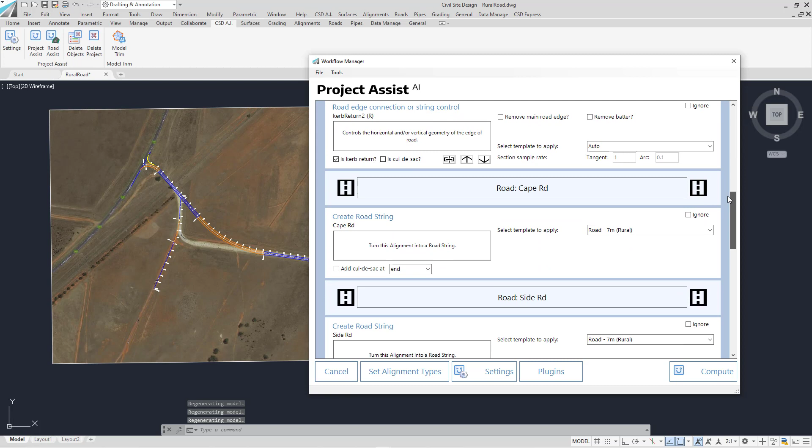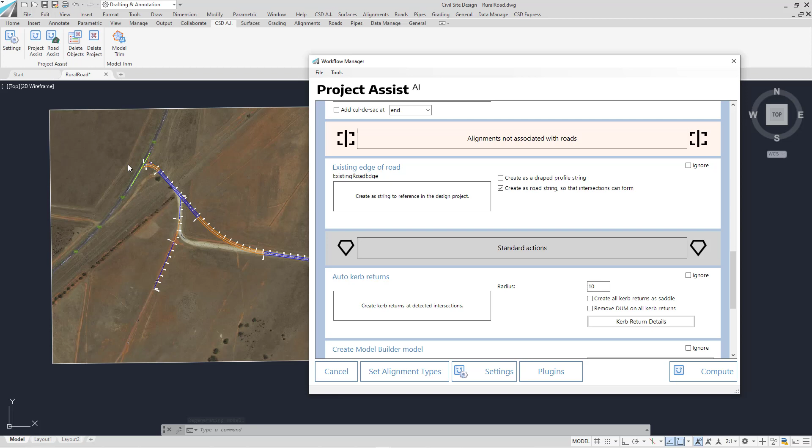And then we've got the side roads - I'm just going to apply a rural template for those as well. For the existing edge, it'll be created as a mini road running along the alignment, and that's so the intersections can form, so those kerb returns can form.

I'm going to introduce you to this plugin called Australian Rural Road Design. All we do is click on Plugins. When you install Project Assist, it comes with 2 plugins - the other one is Model Trim, which we'll make a video on at some point. I just select Australian Rural Road and click on Add Action, so it adds this action to our workflow manager.

What we do here is pick the road that we want to calculate, so Old Urana Road. I pick the design speed - I'm going to go for, say, 80 km per hour design speed. We then set the maximum super elevation that we would apply, and then we tell the software what we want to calculate, and I'm just going to leave all of that ticked on.

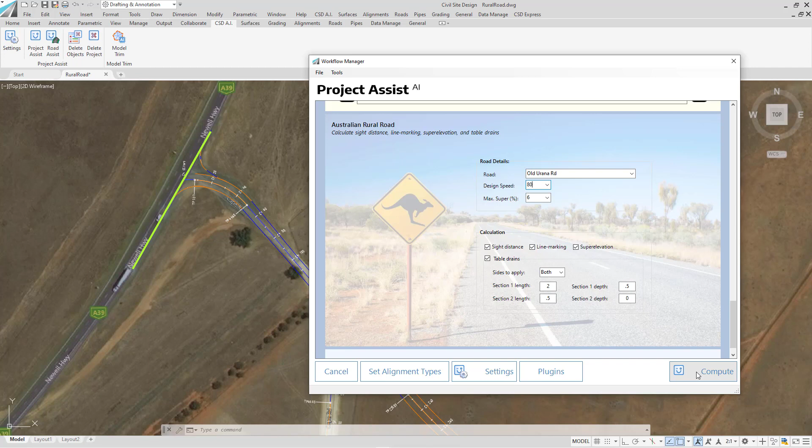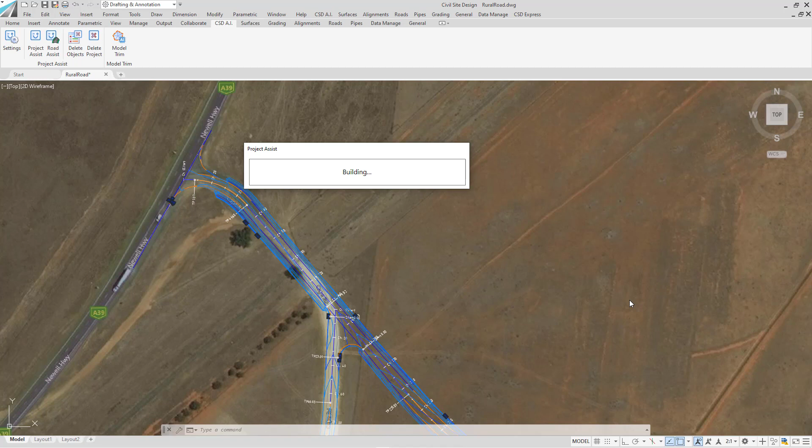The next step is to click on Compute, and Project Assist will run through and build up the project for us. When it's completed, it'll actually load up Model Viewer because that's where some of the sight distance and line marking calculations occur.

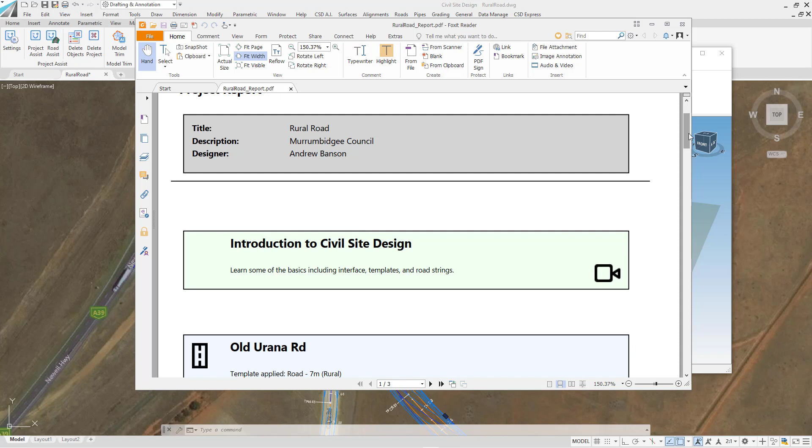If you didn't know, when you run Project Assist, you will get this PDF report outputted. The great thing about this is it tells you exactly what it has done. And if you didn't know, Project Assist will build the project up exactly the same way that a user would, so you can see each step that is followed.

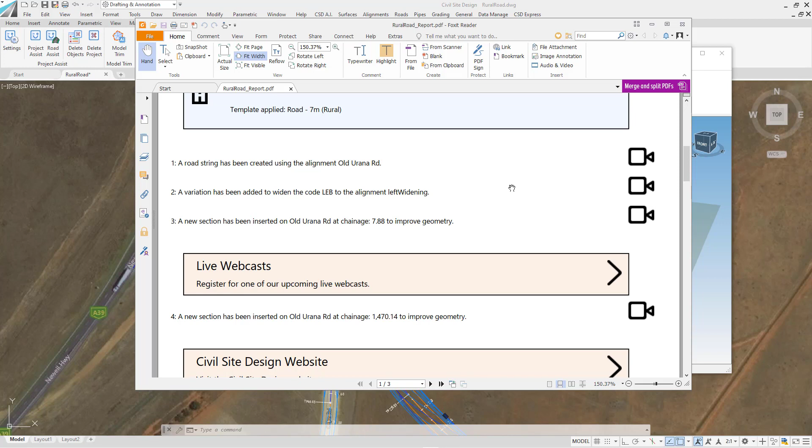If you want more information about one of these steps it's taken, you can click on this link here and watch a video. So if you didn't know how to, for example, add a variation to an alignment, click on this video and it will show you.

If I get to the end of this report, we'll actually see some of the design styles that it's applied to calculate sight distance, etc. So I'm just going to close that down.

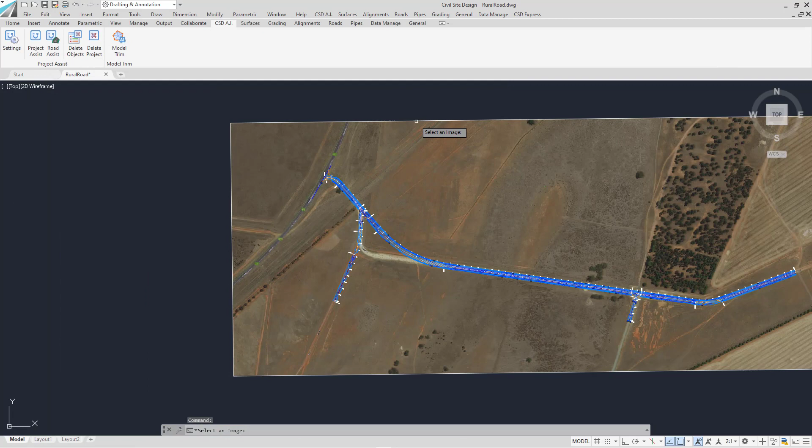The next thing I'll do is very quickly apply the aerial imagery to the base surface. I'm going to go image from drawing, just select on that aerial image. And then I'll run through and show you some of the things that the software's calculated for us.

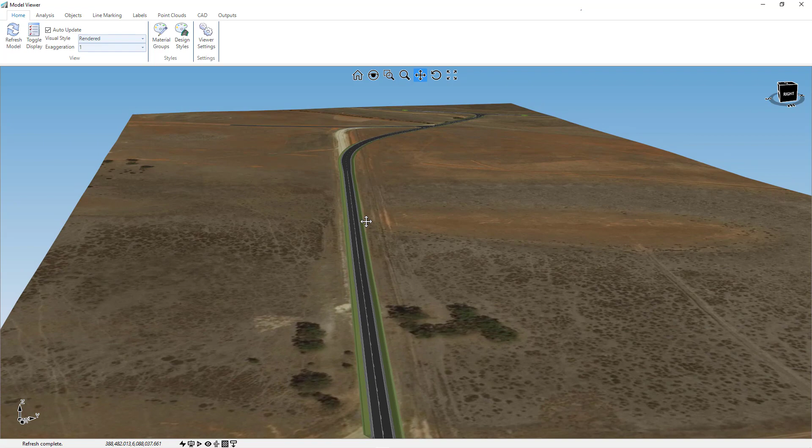Firstly you can see the line marking has been calculated, and the line marking has been calculated using the sight distance. So if I was to go to the Analysis tab in Model Viewer and click on Sight Distance, you'll see that some sight tables were created by Project Assist.

We can review those by clicking on Manage Tables. We've got one for the forward direction, one for the reverse direction. This is fully editable by the user, and we could display the results for those sight distance checks simply by ticking on the check boxes here.

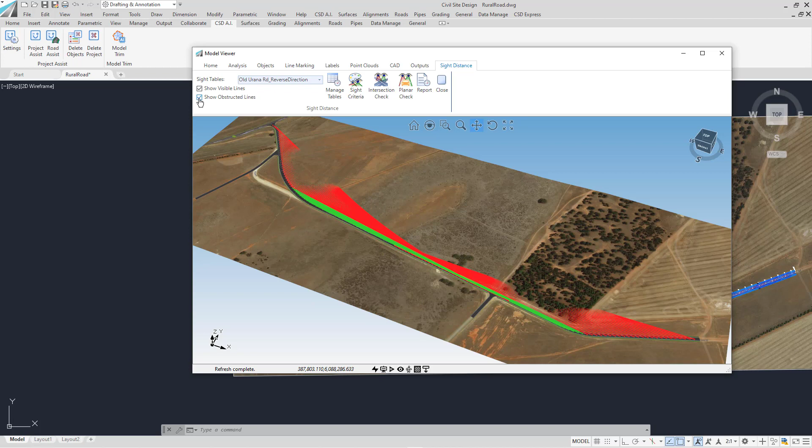It's those sight tables that are being used to calculate the line marking. If you want to review that, you click on the line marking tab, click on marking setup, and you'll see the different lane lines that have been added - line marking calculated at the center line, and we have 2 entries to create the left edge and right edge line marking.

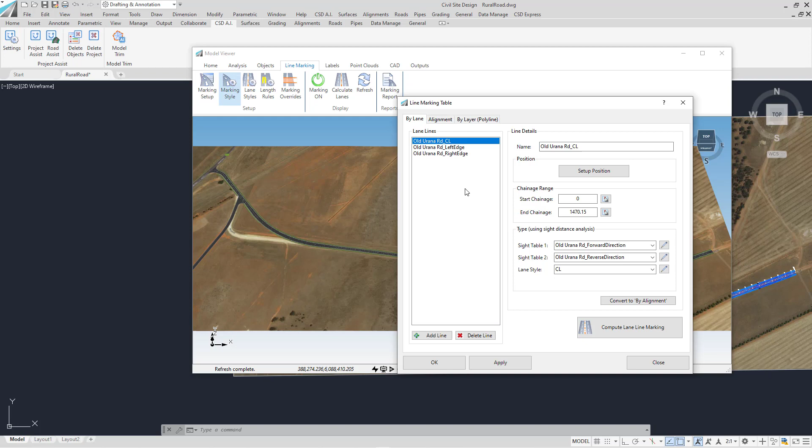If you wanted complete control over the line marking, you can actually explode those, and you do that by running this Convert to by Alignment, and then you'll have full control over the line marking regions, etc. So that's a quick look at the line marking and the sight distance calculations.

If I was to say right click and open up a cross section, you'll see that we have super elevation that's been calculated.

If we wanted to review the super elevation or make some changes to it, we go back to the Roads tab, expand out road string, and then down the bottom you'll see super elevation. So I'll just select the road we want to view - you can see what Project Assist has added in here to create the super elevation.

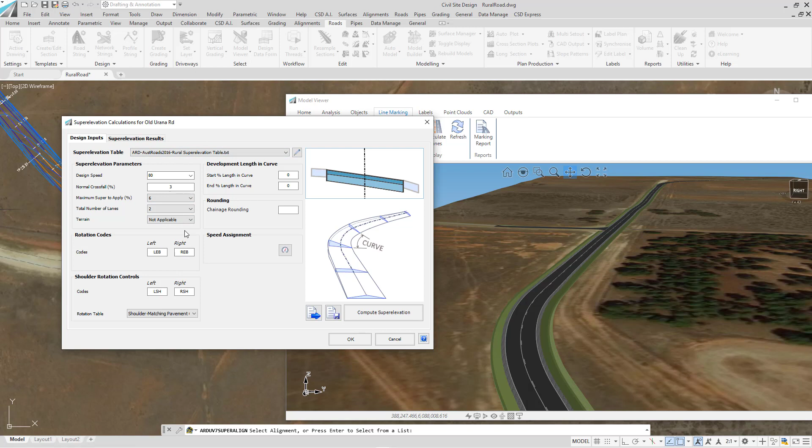The results get shown in this table, which is fully editable. So if you want to change the crossfall or the widening for any curve or recalculate at a different design speed, this is where you go and do that.

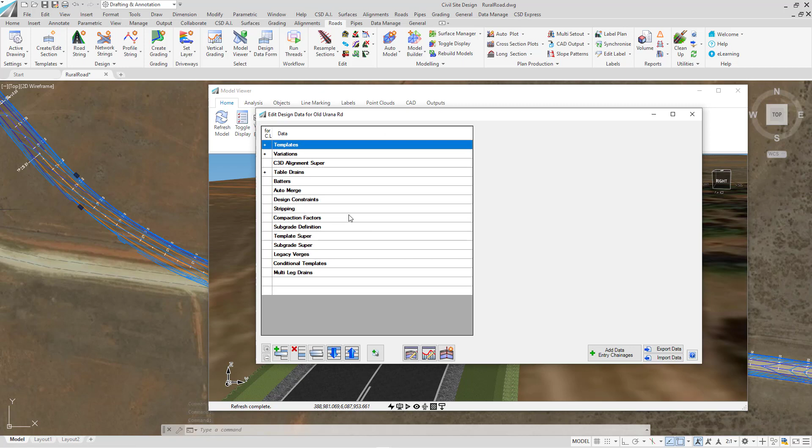The final thing that the plugin has done for us is calculate the table drains. If I go into the design data form, you'll see there's this table drain entry. The way this table drain works is if we are in cut, then the table drain will be put in, but if our road was in fill, then we'll just batter to the surface. So the table drain has a level of intelligence there.

So that's a quick look at the new Rural Road Design plugin for Project Assist, and we'll aim to create a lot more plugins for Project Assist to help you out with certain tasks. The idea here is the plugin becomes a time saver where you don't have to fill out all this information, create all these tables, etc. The plugin will do all that for you and get you up and running.

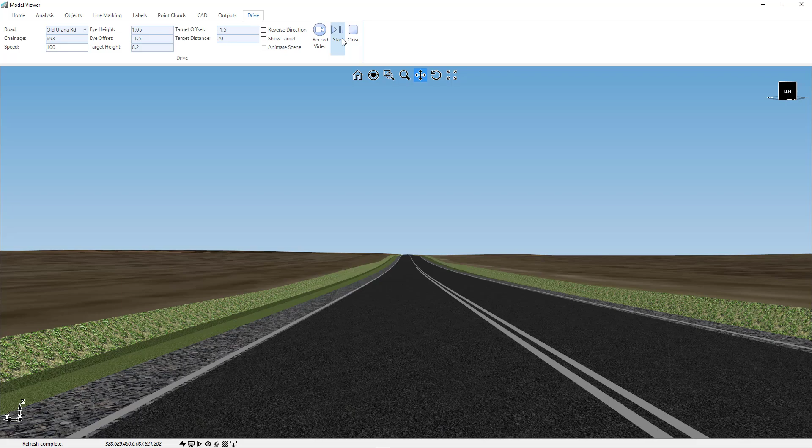Fantastic. There was actually a question, Andrew, which you might be able to answer now - Marco asking, once you've taught the AI, can the AI be transferred to another computer? Yes, there are some files that are stored.

I guess we could open it up now, Jonathan. Yeah, might as well show everyone where it can be accessed.

In your common folder, there's a folder called Job Prepper. This is my common 10, everyone. If you just copy that folder, all of that stuff, and bring it onto the other computer, then it's got a lot of the learning data and the AI model that gets used.

As you begin to build your personal set of projects with the AI, someone else will have their own personal setup, but as Andrew said, with the councils, if you guys have got a standard naming convention for your alignments, the idea would be that you could have someone run this for a bit, set up the convention, and then share that with the team. As new people start, they can go in and access the same setup as everyone else as a base, which is handy. Thanks, Andrew.